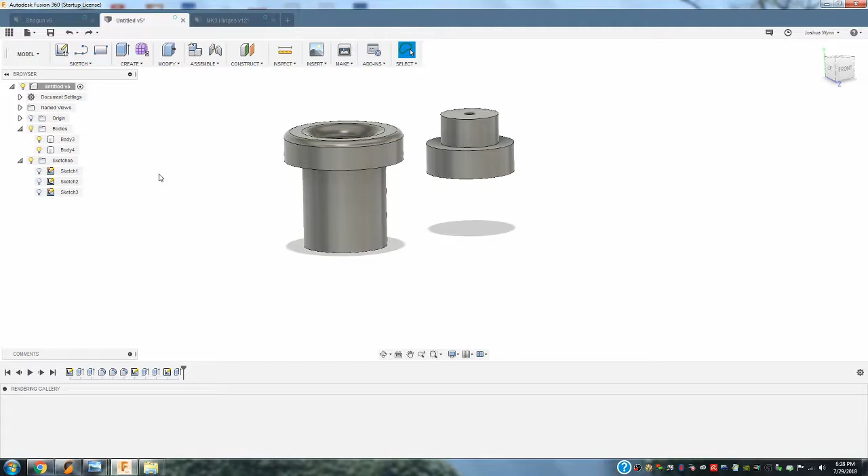So I have two projects that I've been working on. I have a simple item here that is a tube, and I want to make this plug actually insert into the bottom of this tube and be able to move it up and down and display how it's actually going to function. I also have a hinge that I previously created for a 3D printer enclosure that I had built, and the door on my 3D printer enclosure uses these hinges to open and close. I just wanted to quickly go over how I assemble this in Fusion 360 and show how it will function properly.

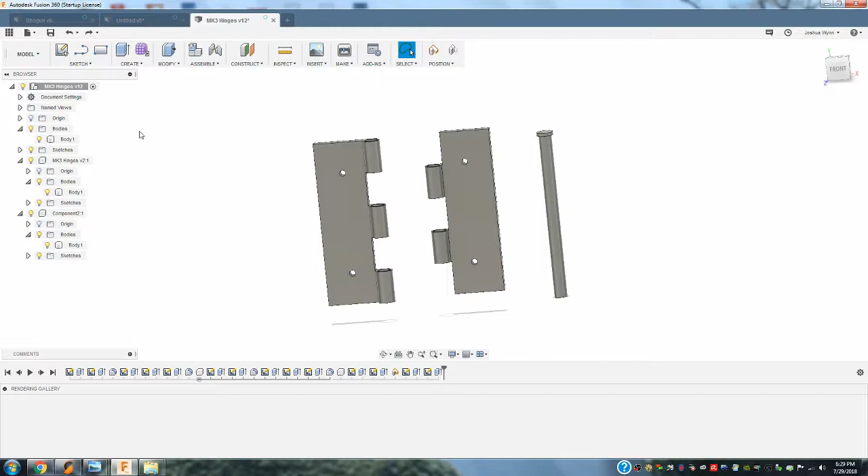So to get into the basics part of creating components that will actually work with the joint function.

The first part of being able to assemble anything is you actually have to assemble components. So all I have right now are two bodies that I've created, and what I need to do is turn these bodies into components. So I'm going to right click, go to create components from bodies, and you'll see down here it created a new body within component 1. I'm going to right click on body 4, do the same thing, and it creates component 2.

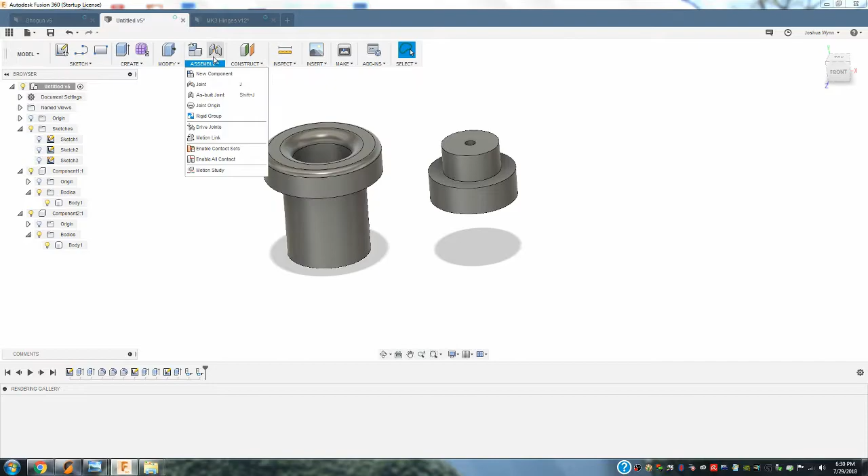So my next step is I can now go to assemble and joint. You'll also see up here at the top there's a shortcut for joint. But I'm going to create a joint.

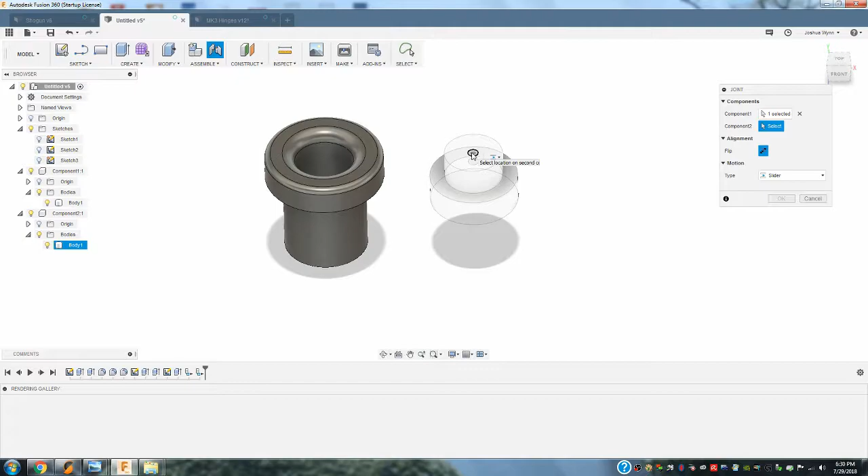Now I need to select the part of this component where I want my joint to be at. Since I want this plug to go right into the center of my tube, I need to select the exact center of my component. So I'm going to select the plug, and then I'm going to rotate so that I can see the bottom of the tube. I'm going to select the center of the tube, and it automatically moves the part over and shows me how it's going to function.

As you can see over here on the right for motion, you have different selections. What I'm going to go over today is how to create a revolute and a slider axis. For this part, all I need is a slider. So I'm going to make sure the slider was selected, which it already was. I'm just going to hit OK because I don't need to do any alignment or offset, since I already selected the alignment by selecting the exact center of the tube and the plug, and they've already been previously measured within my model to fit together. So I'm just going to hit OK.

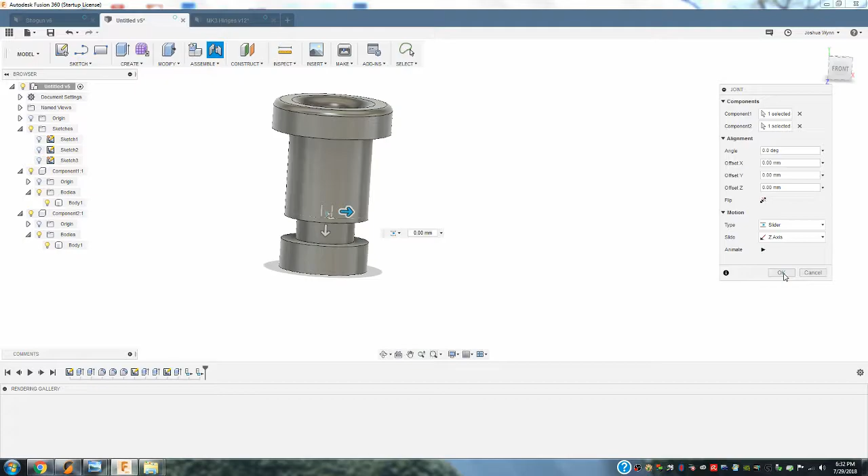Now my next step is to make sure that I can actually move this up and down so that I can see within the window that it will move. As you can see, the whole part moves together. The reason for that is because I need to ground one of these pieces, making it so that it will not move and the other piece will.

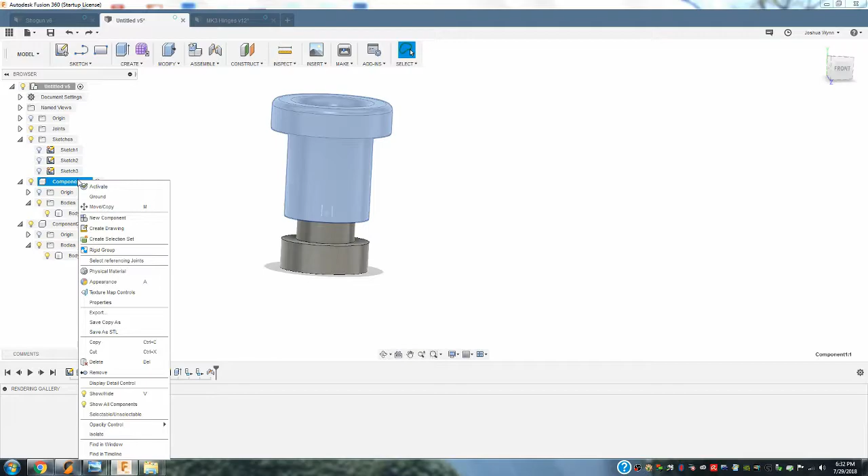So component 1 was the tube. I right click on the component, not the body, but the actual component, and I go to ground. That will make this piece not be able to move anymore. So I left click and I can't move it. But if I left click the other component, it moves up and down.

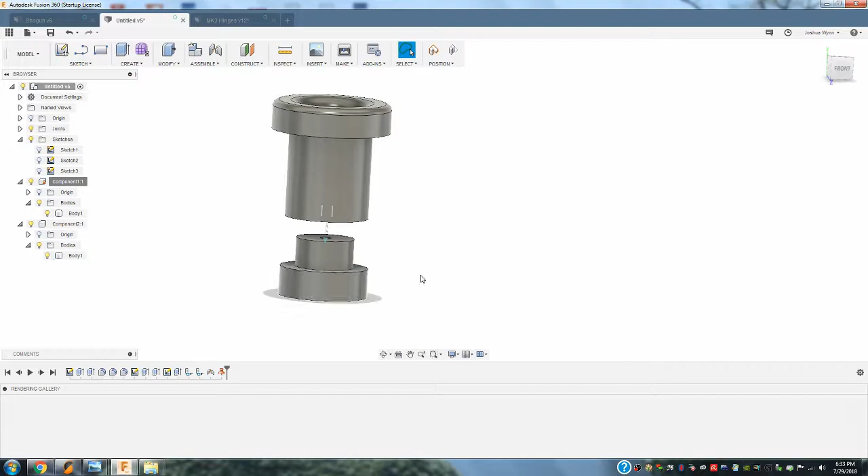As you can see, when I'm sliding it up and down, it's actually going through the whole part. I don't want that. So I want to make sure that this is actually sized correctly and that these pieces are actually going to fit together without anything blocking it.

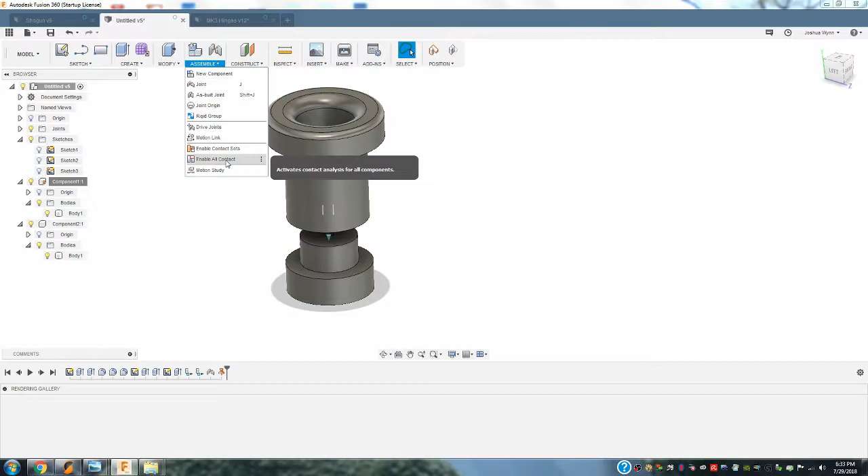So what I need to do is go to Assemble, and I'm going to enable all contact, which will enable every piece of this assembly so that if there's a part that touches another part, if there's physical contact, it's going to stop. So once I start moving it up, it makes contact with the bottom and it stops.

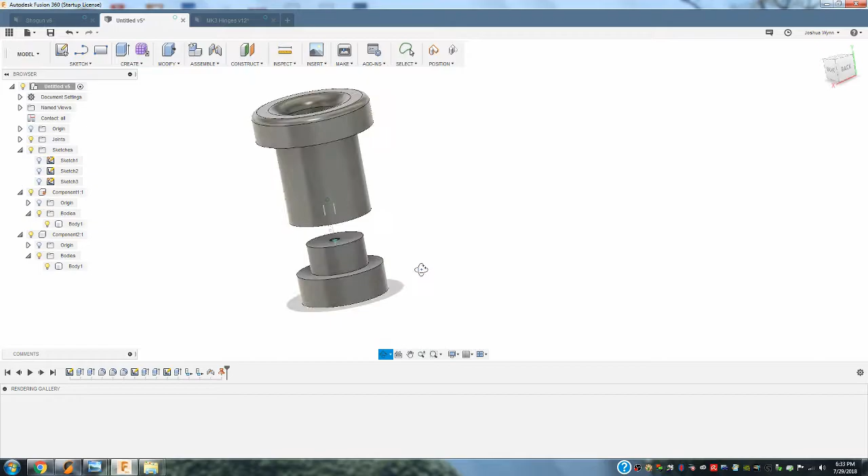As an example, if this was offset at any part, or if my measurements were wrong, when I move this up, say it was offset by a couple millimeters, I would move this up and it would hit the edge and just stop right there, instead of going all the way up into the tube and making contact with the outer brim that I created for this plug.

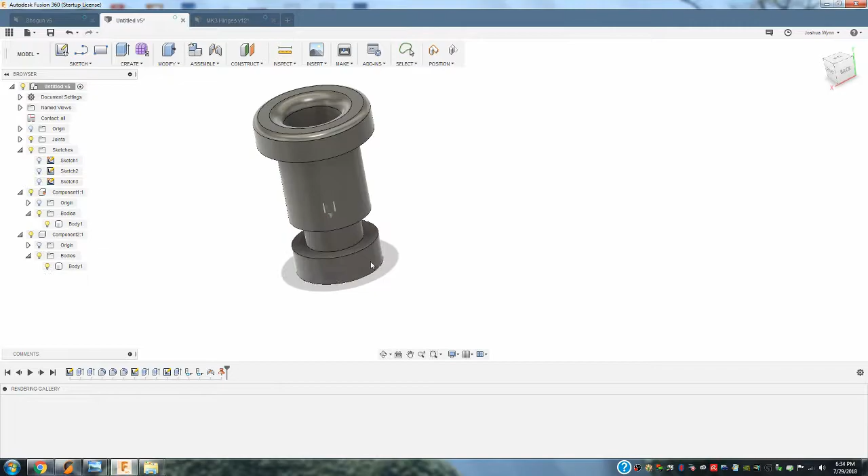And that's a very simple way to create an assembly using joints. I want to show you how to do that with this hinge. It's a little more complicated, a little more parts involved, but pretty much the same scenario.

I already have previously created the component, so I don't have to worry about that, and I already grounded the left part of this hinge. So I can just go ahead and start creating my joints.

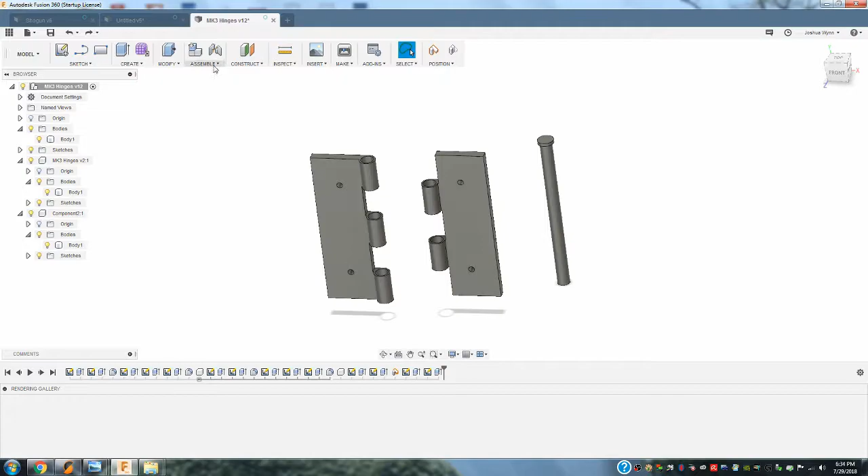So I'm going to create a joint. As I move these pieces around, that's what this pop-up is about. I'm just going to go ahead and capture the position. I'm going to select component 1, the part that I want to be movable within the part.

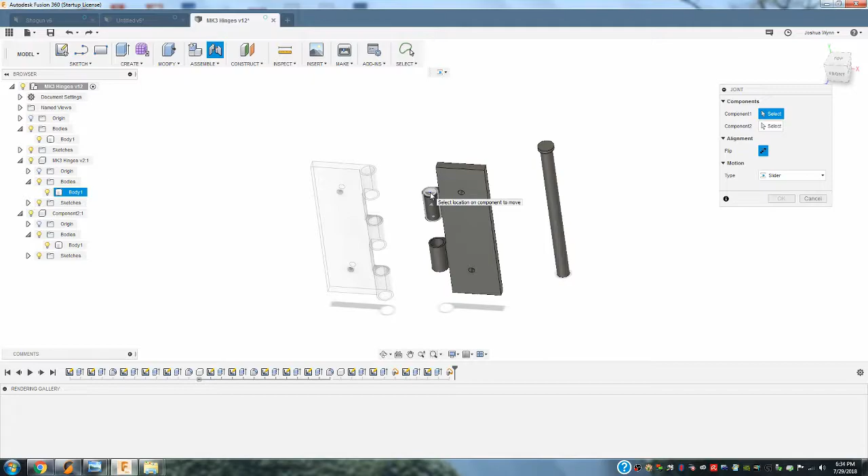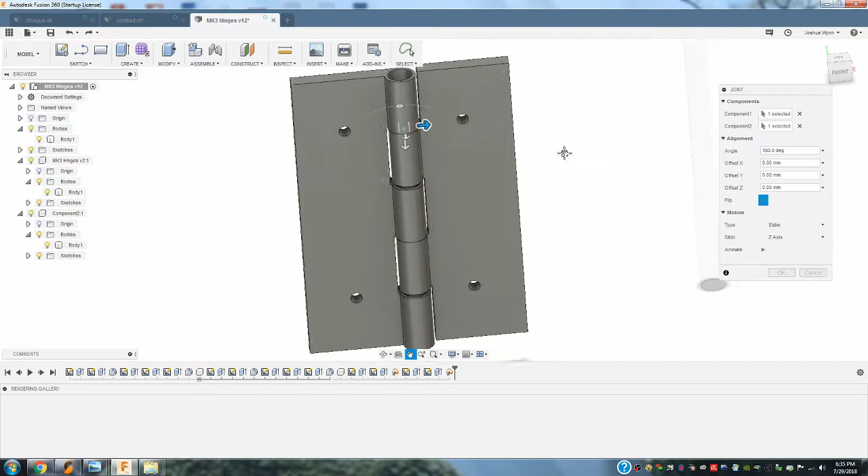I want this section of the hinge to line up with this bottom piece, and I need the center to be aligned. So I'm going to select, zoom in, make sure I actually select the center, and it moves it over. As you can see, my motion is still set as a slider, which is not what I want.

I want it to be a revolute. So I'm going to select revolute, and now it's going to move around the hinge the way it's supposed to. If you look closely, the hinge is actually touching up here.

I don't want it to touch exactly because I need some free movement when I actually put these pieces together. So I previously measured this gap here, and I know it's about 1 millimeter. I'm going to offset the bottom, dragging down to 0.5 millimeters, and that gives me an exact gap between both top edges and the bottom edge.

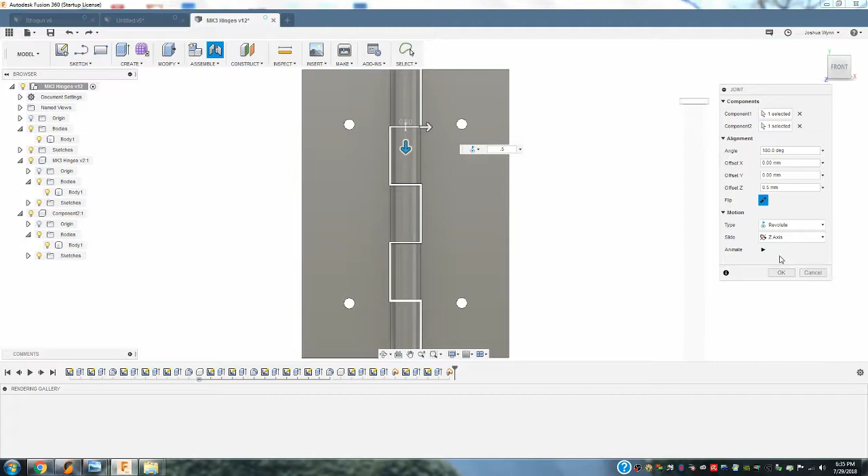Everything else looks okay for what I want it to do. So I'm going to hit OK to finish that piece, and it should move around the correct axis. As you can see, it's going all the way around, and I don't have the enable contact enabled yet, so I'm going to go ahead and enable that.

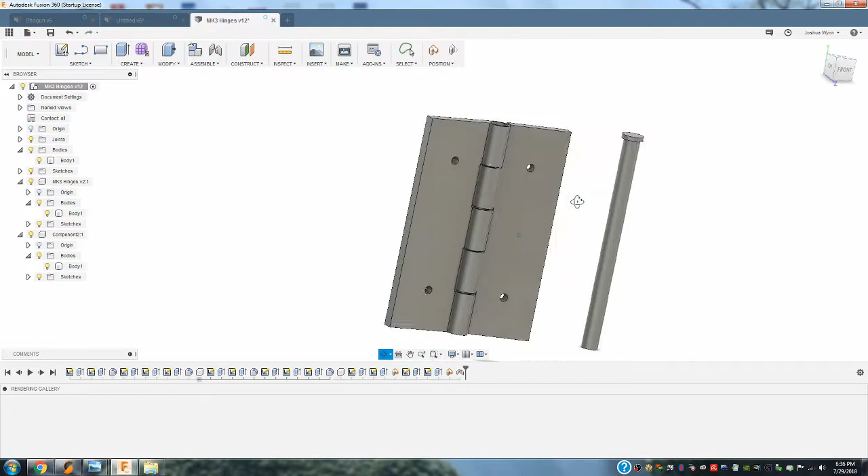Before I show you how this works, I'm going to put this pin into the hinge. I want the bottom part of the pin to line up with the bottom part of the hinge.

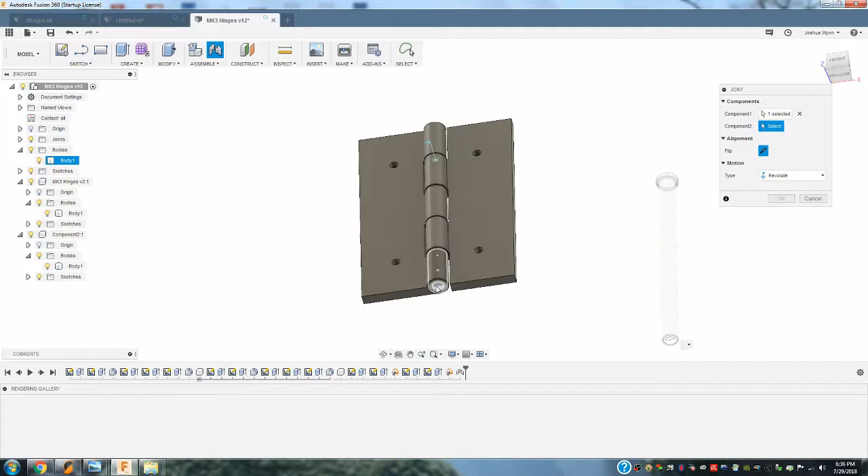So I'm going to go to a Joint, select the bottom part of the pin, then select the bottom part of the hinge, and it's going to insert it in there. Right now it's set to revolute, so I need that to be a slider because the pin will slide into the two pieces of hinge to connect them together.

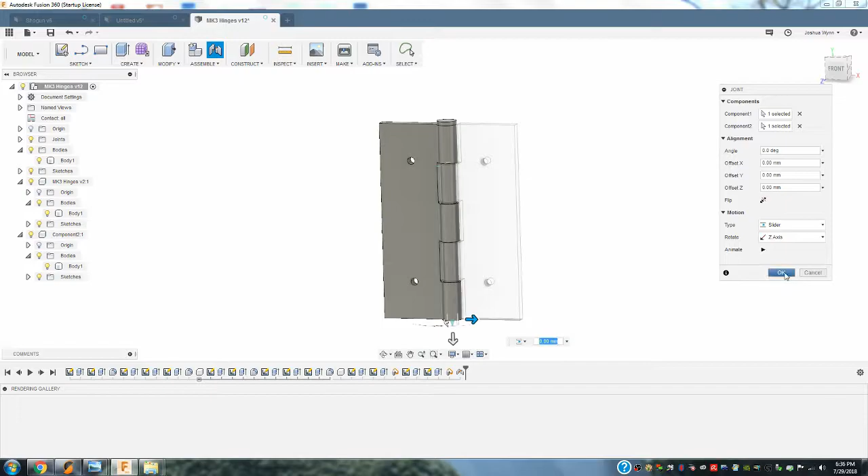And there it is, so I'm going to hit OK. Now, since I enabled all contact, I should be able to move this hinge as a functioning hinge. So I'm going to grab this piece, and it should stop right when it touches that, and it does.

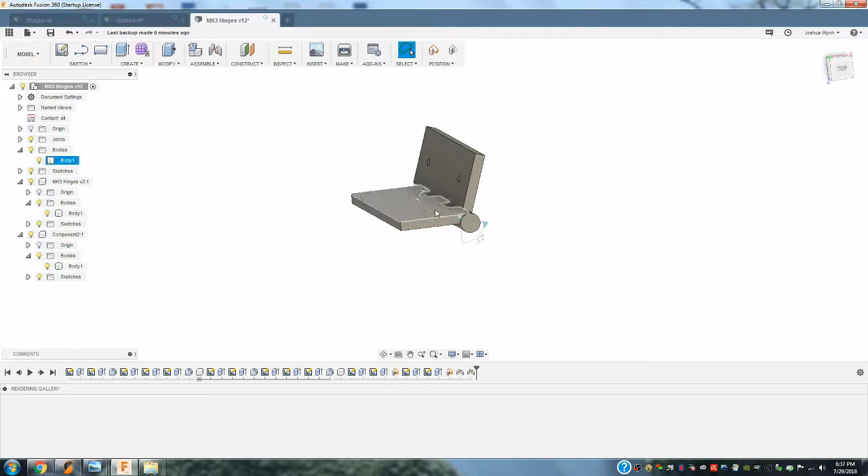Then if I look at the back part of this hinge, and I grab it and turn it around, it should stop right when that edge hits this face. And it does. So it's functioning, the faces are functioning.

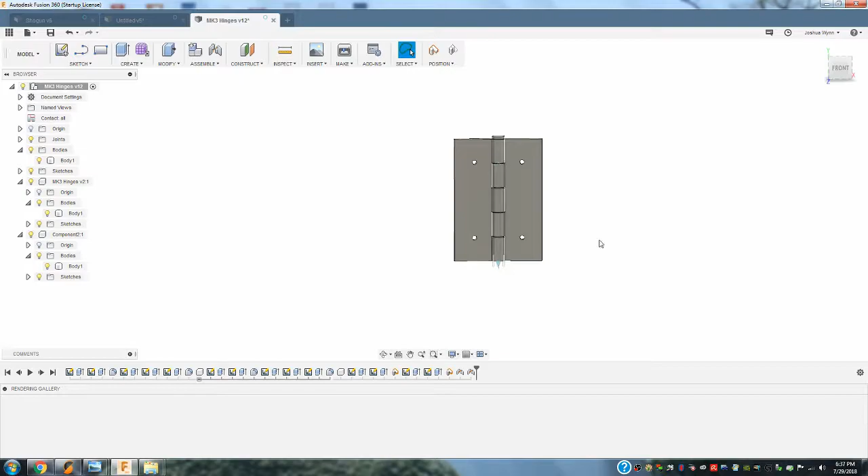Now if I grab hold of the pin, I should be able to pull it up and down. Pull it out, put it all the way back in, and it should stop. And it does, because it makes contact with the top. So I have a functioning hinge.